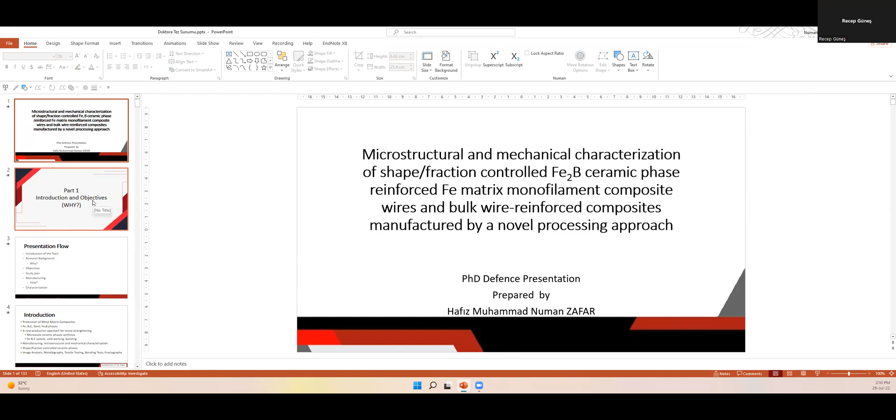So the first part is introduction and objectives. The presentation flow is in such a way - let me make it full screen. I will introduce the topic briefly, then give a little research background and the reason why we did this study, the objectives of the study, how we planned it, and the manufacturing approach - how exactly we have done the manufacturing. So these are the why and how of this study. Then there are different methods in which we have characterized the material we have manufactured. So the overall presentation flow revolves around these headings.

So in a nutshell, we have manufactured metal matrix composite wires. The materials which we have used are iron and B4C, boron carbide, in powder form, and steel tubes, and eventually we have managed to synthesize iron boride phases in the material. This study is a new production approach for metal strengthening, and we have managed to synthesize ceramic phases at a micro scale. For that, we have used boriding treatment, cold working, plastic deformation, and predetermined ratios of the mixtures have been used.

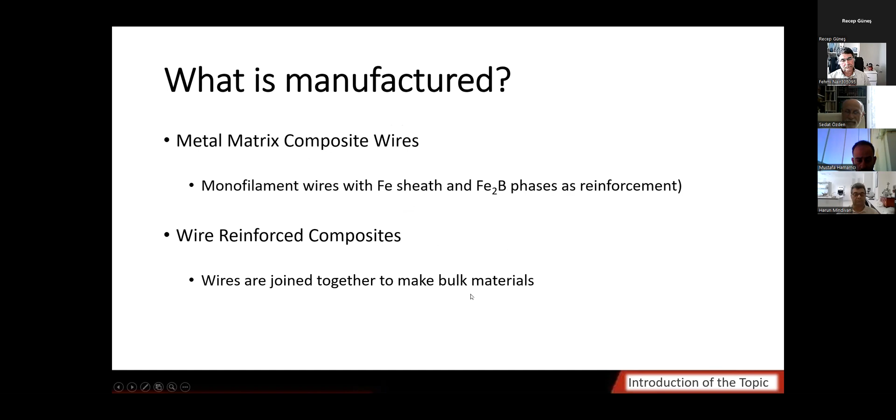So what is manufactured? Metal matrix composite wires. These are monofilament wires in which the sheath of the material is iron, and Fe2B phases act as reinforcement in the wires. The second part of the study is wire reinforced composites - whatever wires we have produced, we have combined them and made a bulk material with that. So that is what has been manufactured.

I will very briefly tell you about the metal matrix composite wires. If we divide the metal matrix composite wires according to their properties, we have seen industrially active wires which are high strength wires, high conductivity wires, and high strength and high conductivity wires all together. The high strength wires are 4 millimeter to 12 millimeter wires made of high carbon steel, which we have seen in fences outside buildings for security regions. Medium carbon steel wires are also available in industry and used similarly.

These are high strength wires - no other functionality is expected from them other than yielding, some ductility, and strength. Then the second type of wires we have seen in metal matrix composite wires are high strength and high conductivity wires. Me and my respected supervisor, Dr...

Fehmi Nair, we wrote this paper, which is basically a review paper on high strength and high conductivity wires, while I was doing the research for this study, for my thesis. In this paper, we have shown how the composite wires are manufactured, what type of metal matrices are used, what type of strengthening mechanisms are used, what type of materials they use, and what type of methods they use to produce them.

The most famous method for making composite wires is plastically deforming them. What they do is select a sheath of a metal, and put a strengthening element inside the sheath, and that material in a monofilament state is subjected to various plastic deformation techniques. You can bundle them, deform them, cold roll them, heat treat them, whatever you want, but the main purpose is to plastically deform them from this size.

This is about 8 to 12 millimeter, and then it comes into maybe a 2 millimeter wire size. After passing through this series of cold rolling and heat treatments, the tensile strength of the wire is extremely high, and then you can use these wires.

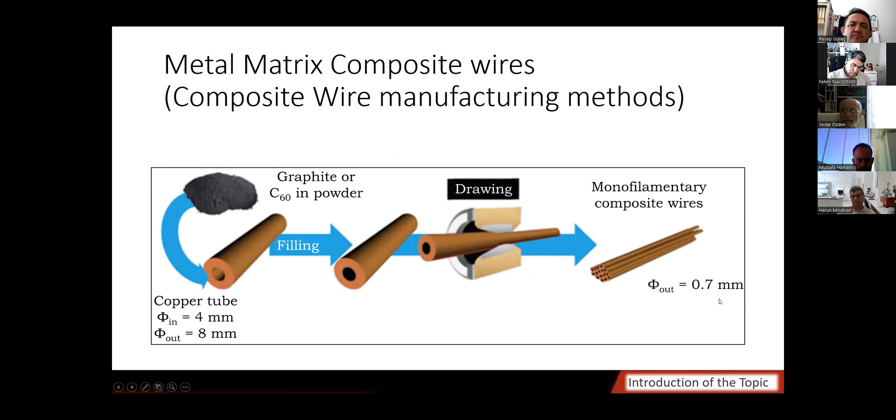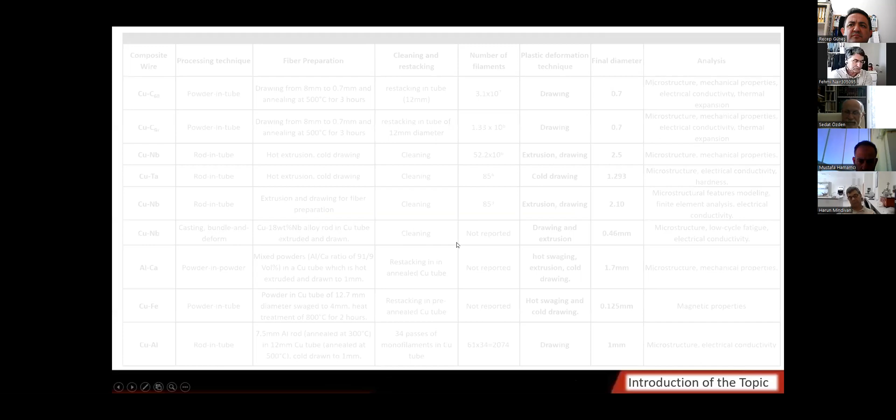Here I have this table which belongs to my thesis. I selected this to show how different types of composite wires are used and what type of technologies they use. For example, mostly we see powder in tube, but there are also rod in tube combinations and others. The eventual size of the wire is in this range: 0.7, 2.5 millimeter, 1.2 millimeter, 2.10 millimeter, and 1 millimeter. These are the number of filaments which are produced.

How do we know the number of these filaments? Because we have used plastic deformation, and each rolling pass which we used was in our control. So we know at which monofilament we started, and eventually how many filaments we established inside. So these are the range of diameters of composite wires after the deformation, and these are the starting diameters, 8 to 0.7. These are some fields in which these composite wires are used.

They are used in... one second, please. Could you go back to the last page?

Yes sir, you said it is related to your thesis, or is this something you have done? This is not - this is the background of my study. So this is information from literature. Exactly. What the composite wires are, which diameters they have used. I wasn't sure why I said that - so when you said it belongs to my thesis, I thought you did it. Of course not, we did not do this. This is background, from the literature. Yes, actually a published paper also.

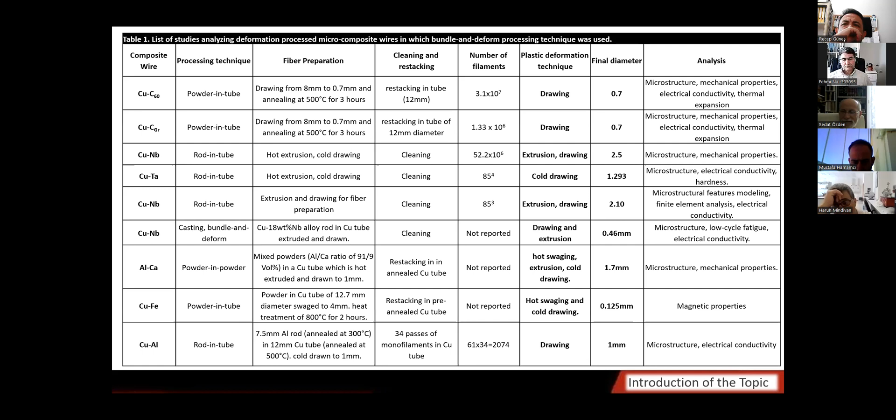These are the applications: long pulse, high field - why? Because they are conductive. High field electromagnets, because during the making of electromagnetic fields, you need high strength wires because of Lorentz forces.

High voltage electric transmission wire cables use aluminum, because it is light and also conductive. Bulk materials at nuclear sites are used because, again, depending upon the type of strengthening element, if it performs well and does not swell at the nuclear sites, you can use it there.

Antibacterial implants - copper niobium wires are used as antibacterial implants because they are compatible with human tissue. Diamond wires are used for cutting slabs and ceramic materials, because they are high strength and high conductivity. You can use them as cutting wires, and they are famous as diamond wires because diamonds are impregnated on the sides of the wires, so you can use them for cutting slabs.

Okay, now after that, I'm coming to my thesis.

Based on the paper we have published, I have seen that many people have worked on composite wires. If you look at the literature, there are a lot of studies reporting the microstructure and other aspects of composite wires, but very few have made wire reinforced bulks. They complete the manufacturing at the wire level and stop there, because their eventual purpose is to make wires. Very few studies have used wires as a reinforcement element in wire reinforced composites.

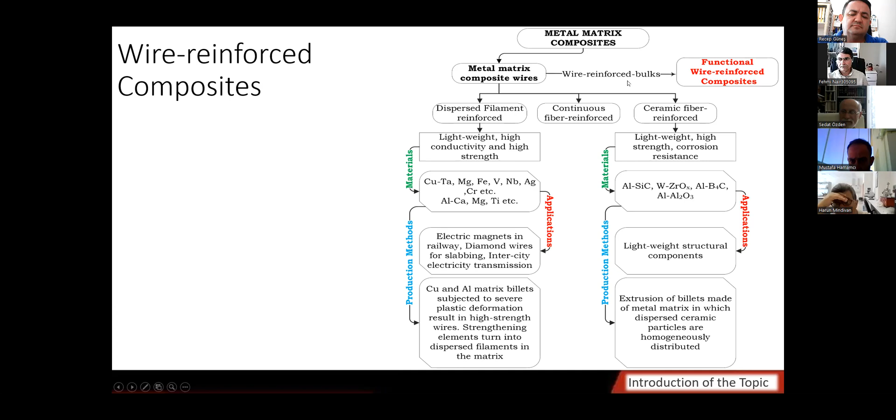Here, copper, magnesium, and aluminum are the dispersed filament reinforced wires. I have already given you the background about this. These are functional wires, used as lightweight structural components. Applications and types of materials are reported, and we studied this and made a review about it, but then we proceeded to functional reinforced composites.

Functional wire reinforced composites, to be exact. How are functional wire reinforced composites made? The most famous technique is squeeze casting. You take a wire, clean it, stack it, put a metal melt on it, and then eventually machine it to the resultant final product. That is a wire reinforced metal matrix composite. This technique is industrially active, but it is an old technique.

Here is Zafer. Yes, sir. Go back. One page back. Yes. Here, the thickness of the foil is more or less the same as the wire.

So would you call them plates or foils? These ones, we can call them plates, not foils. Yes, okay, we must call them plates. You are right, we must call them plates. Foil is something used only to assist the bonding, not serving as a matrix. If you actually desire to make a matrix, we must not call them foils, we must call them plates. It could be better, probably. But if you look at this image, the thickness is not actually like a foil, this is a matrix form, but because the literature-active term used for that is foil, I have used foil. Actually, I was also thinking it is not a foil. Okay, I agree with you.

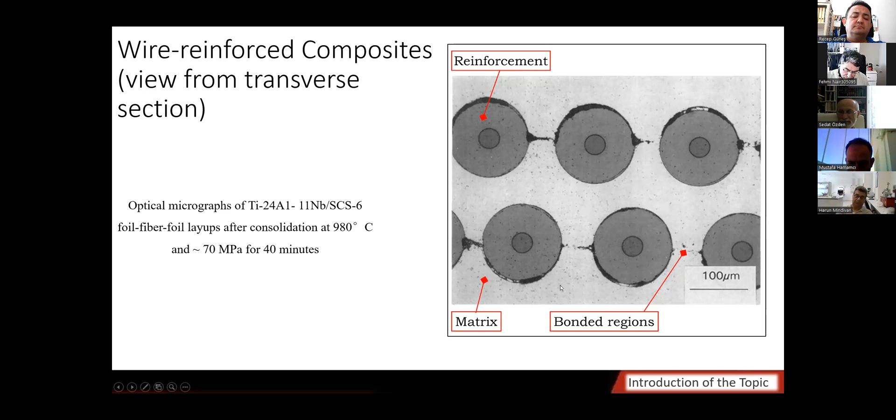So here is an example from the literature in which wires are used as reinforcement, and here the bonding has partially occurred, not completely, and this titanium is working as a matrix.

The current ceramic particle reinforced wires produced in industry right now use a mechanical approach. What they do is use extrusion and drawing. Before extrusion and drawing, they mix powder forms of ceramic particles with the metals, and subject them to extrusion, drawing, and other techniques, for example powder mixing by ball milling. Then they are hot pressed. A series of treatments, as I have shown you in previous slides, and eventually ceramic particle reinforced composites are produced. The ceramic particles work as a strengthening element of the composites. This is a mechanical approach.

They use physical or mechanical methods to distribute the ceramic particles in the metal matrix. But because the ceramic particles are really hard, these methods only help in distributing them, and the most work is done on the matrix because they plastically deform the matrix, not the ceramic particles. So they do not have good control over the geometry of the ceramic particles inside.

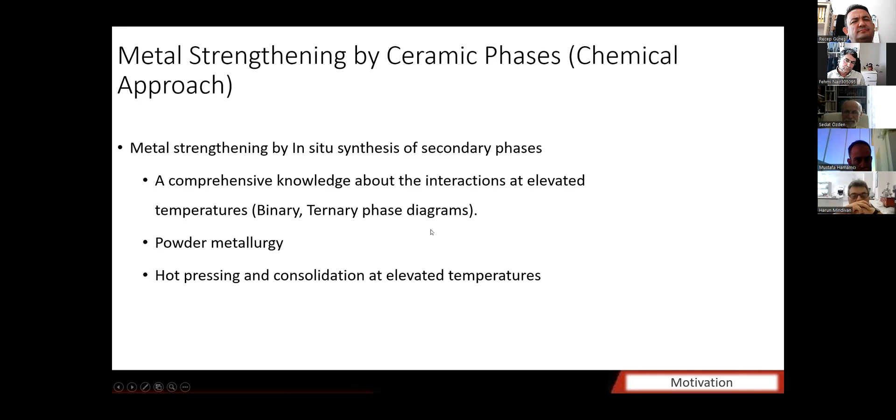As I told you, we need to have some knowledge about the interactions of the used powder particles at elevated temperature. You must use binary and ternary phase diagrams to understand what type of phases are going to be produced. Powder metallurgy is necessary, and I will show you why, along with hot pressing and consolidation at elevated temperature. So this chemical approach can be used to make ceramic phases reinforced metal matrix composites.

This study belongs to composite wires. This is my study in which I have used cold rolling after compaction, and I have also used elevated temperature sintering. My in situ synthesized phase is iron boride.

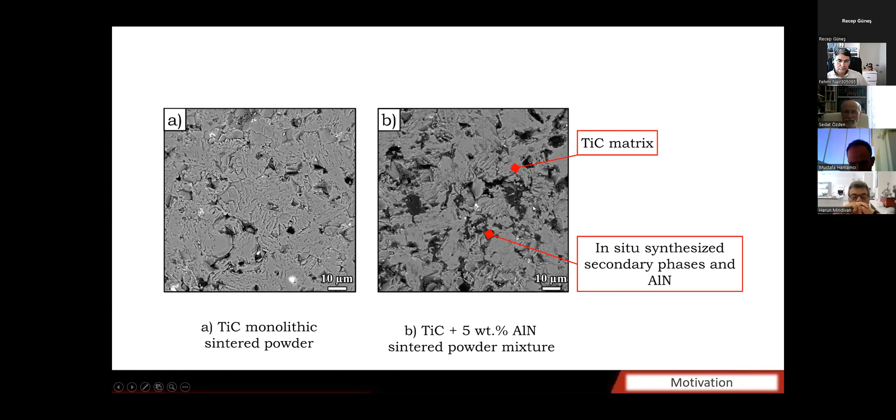Here is an example of the microstructure in which titanium carbide is reinforced by the in situ synthesized secondary phases. Powder form without any phase, and powder after heat treatment is strengthened by the secondary phases. Here is another example in which titanium is in situ reinforced by these secondary phases. So metal reinforced by ceramic phases, chemical approach.

This is totally related to my study because they have used iron boride phases, low iron boride and high iron boride phases, and they have used iron as host particles for the strengthening of iron particles. But before going to that, we need to understand what exactly is going on here.

Boriding is a surface treatment which you might have heard of, in which boron particles are impregnated, actually diffused into the iron lattice and surfaces of steel materials. Steel hosts are hardened and used in wear applications, mostly in wear and high oxidation applications, and they give corrosion resistance to the material. What happens is the formation of hard iron boride phases occurs on the surface of the steels.

We have used the same phases, not as surface enhancing phases, but as in situ strengthening. So our approach might look like the same physical and chemical phenomenon is happening, but it is different because we are using it as an in situ synthesis of iron boride phases, which will eventually strengthen the matrix.

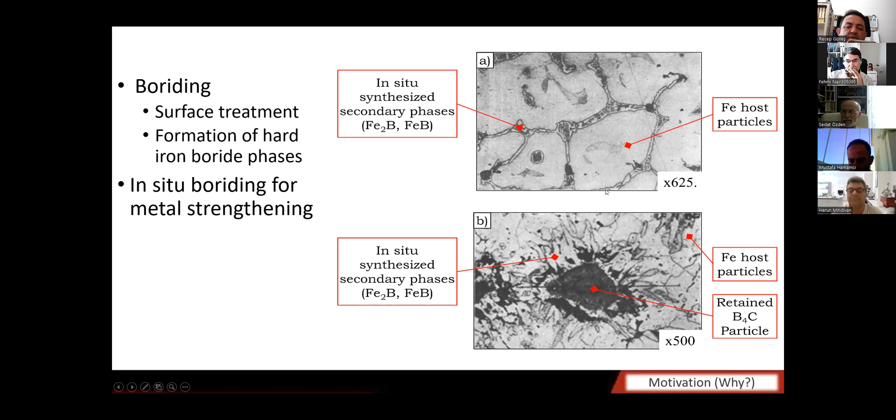Here is another example. This is a Turkish researcher who used a similar approach, but he individually borided these iron host particles, and he managed to get these ceramic phases on the surface of the iron particles. Here is another example in which in situ synthesized iron boride phases are used, but because they used a very high temperature, a liquid phase was formed on the surface, so they were not able to control the composition of these phases. But this is also an example from the literature in which the iron particles have been borided.

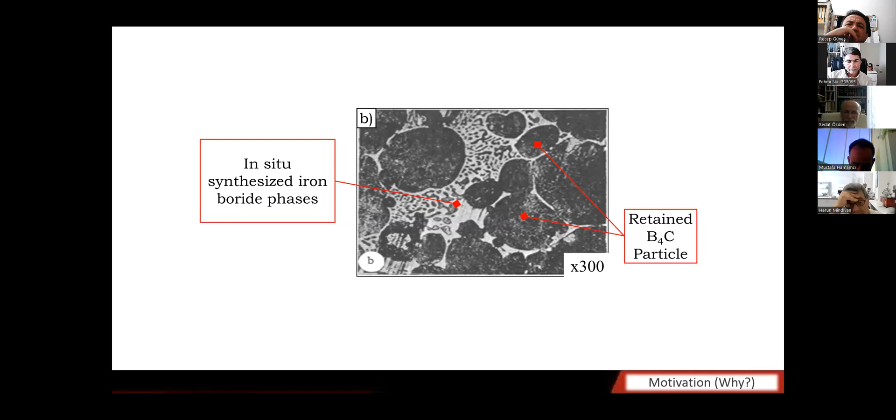Last night when I was checking the literature, I came across that on 31st of August 2022, Metals, which is a very prestigious journal in our field, opened an option for ceramic reinforced metal matrix nanocomposites. And when I was studying the details, it was shown that if you have a new processing approach, a different processing approach, any chemical approach is also welcome in which the metal matrix is strengthened at nanoscale.

So the objectives of this study are: Fe matrix, Fe2B phase reinforced monofilament wires manufacturing, with controlled morphology, shape, and distribution of the fraction of iron boride phases. Then ceramic wire reinforced bulks are produced, in which the Fe matrix is reinforced by the wires at a macroscopic level, and the wires are further reinforced by the iron boride phases.

This is the type of anticipated material which we are expecting, at the atomic level, iron boride phases inside the core of a wire. The core goes into the steel, and a composite wire is produced.

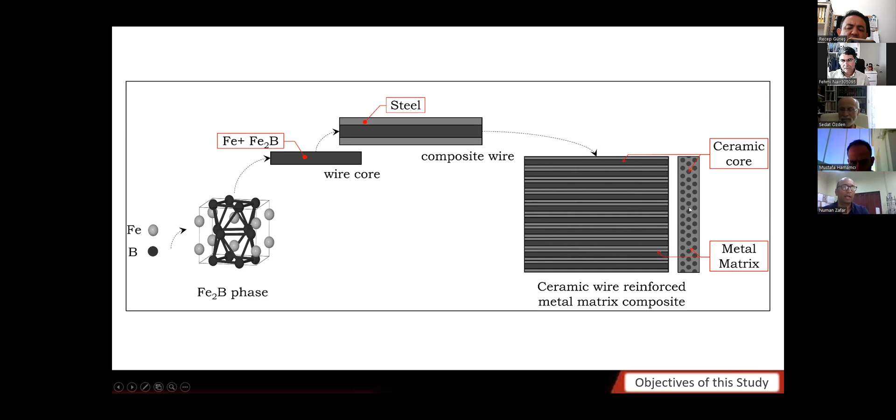So this is a typical microstructural characterization. I have studied the cold deformation behavior of the powder particles before phase synthesis and after phase synthesis, and I have studied the influence of B4C content in the boriding of Fe particles. And here I have also reported the microstructure of wire reinforced bulks. Because I'm going to show you all of them individually, I don't want to waste time here.

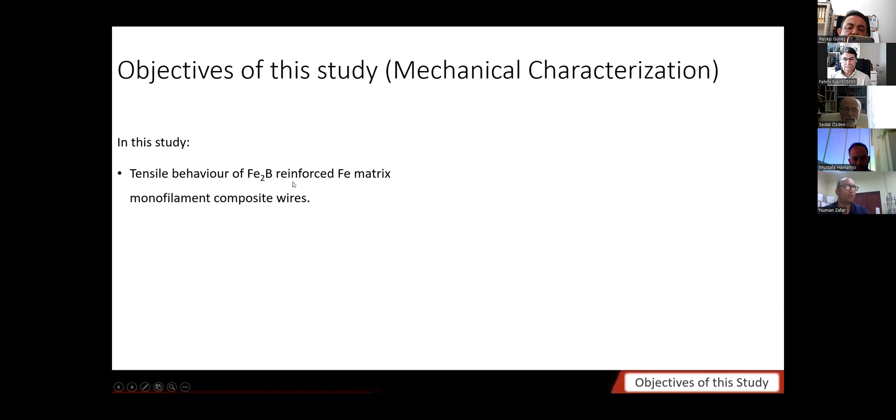The mechanical characterization is done by the tensile behavior of Fe2B reinforced composite wires, and ultimate tensile strength of the wires is also reported, along with the hardness of the sheath and the cores of the wires.

All these studies are mechanical studies at the wire level, and then these studies are at the bulk level. We have used 3-point bending tests. Interlayer shear strength of the wire reinforced bulks is reported, and hardness of various regions in the wire reinforced bulks is also reported. So these are the mechanical characterization objectives of this study.

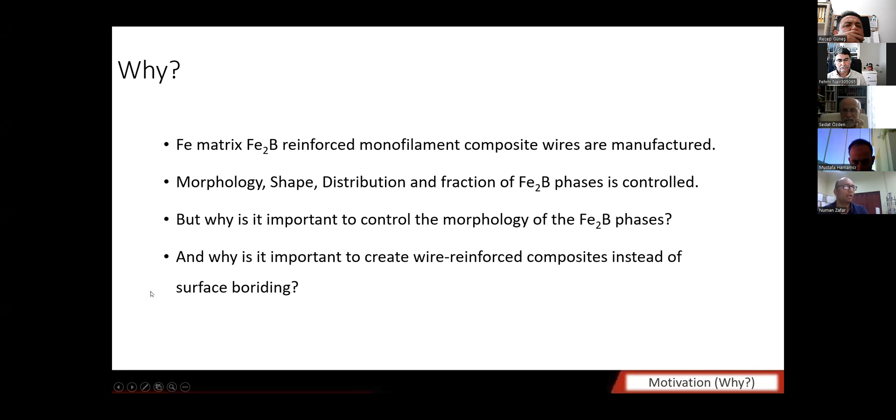I have told you that we have been able to control the morphology of iron boride phases at the wire level. But why is it important to control the morphology of Fe2B phases? And why is it important to make wire reinforced composites instead of surface boriding? I will try to answer them now.

In November 2021, this paper was published while I was trying to find a way to control the morphology and orientation of Fe2B phases. This study reported the influence of the morphology of Fe2B phases on the erosion wear behavior of iron boride alloy.

Here are some old studies in which different methods have been used. For example, different methods have been used to control the morphology of iron boride phases, the effect of orientation, the influence of iron boride phases on corrosion behavior, and different ways to control the morphology and microstructure size of iron boride alloys. So this topic is, both industrially and in the literature, a new topic indeed.

All of these studies used casting and elevated temperatures to achieve the same thing. I have managed to do the same thing without involving liquid phases and without using elevated temperature.

And here is the reason. One might ask, why go through all this trouble and not just surface boride the material? The surface boriding of steel is used only for corrosion and wear resistance in aggressive environments. Mostly, whenever you have a steel, because you have a lot of wanted and unwanted elements in it, whenever you apply surface boriding, there is this softer sublayer which is formed under the borided element. In this approach, we don't believe something like this will happen.

What was your aim? Well, first of all, as I showed you here, they have been using different methods to control the morphology of iron borides. Their main purpose was to control the corrosion behavior and to make a material which is corrosion and wear resistant, using a quite difficult manufacturing approach. My main focus was to use an easier and much less complex manufacturing approach. But eventually, our applications also matter, because the phases produced are very hard and tough at the same time, making them most suitable for wear and tribological applications.

Okay, let's say I am a manufacturer, okay?

Yes sir, I want to invest money, so advise me where shall I use this material? Well, I was discussing this with my supervisor, and he also told me that this is the core question. Yes, core question. Because these wires are produced as a strengthening element, they can be used anywhere.

Where you want a wear-resistant material in tribological applications. I believe so. Okay, military equipment - because the metal matrix is conductive and lightweight. Also in magnetic applications, because we have used steel as a sheath, and it is a magnetic material.

And also in the previous study, Dr. Mustafa has studied the impact behavior of these phases, so they can be used in military applications. They can be used in the sleeves of the pistons. We have discussed this - wherever you require hardness and toughness at the same time, you can use this strengthening element wires.

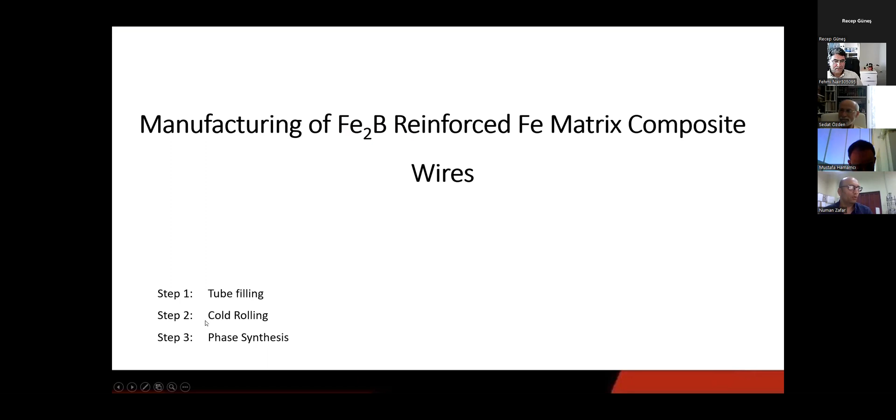Zafer, yes sorry sir, for interrupting, but sometimes I need to ask. Sir, the more you ask, the more I will be directed in the right direction.

Thank you. These percentages, are they from literature or from experience? 5, 10? These are from a very comprehensive analysis I have provided - I will show you in the next slides. Okay, they are not random. I didn't say that - are they just from literature or from past work experience?

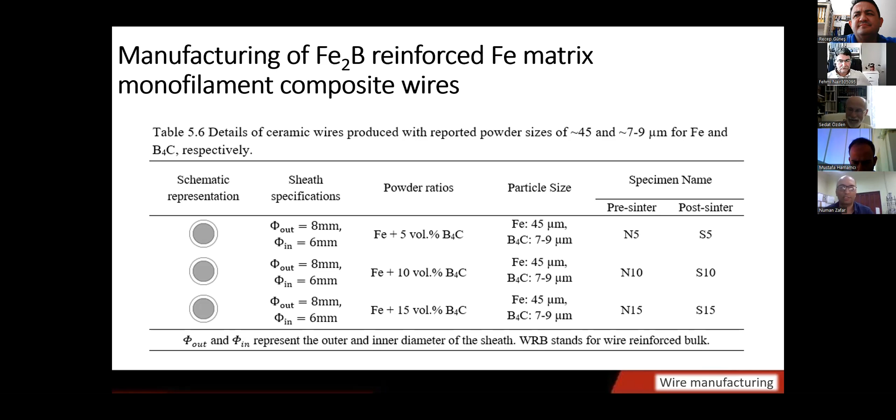These percentages are provided because I want to make a phase of only a single phase, low boride phases, and these are after an analysis we have done on the ternary and binary phase diagrams. After studying that, we have used these ones. These ratios correspond to these weight percentages, and these weight percentages correspond to the phase diagram, the type of phases we want to acquire. Yes.

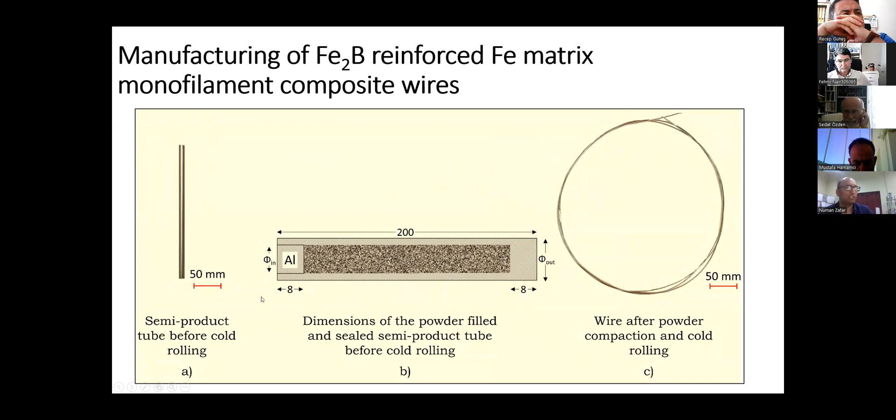After filling the tubes, here they are subjected to this cold rolling device, going from 8 millimeter to about 1 millimeter. The cold roll wires reach from this state to this state - these are the dimensions of the material, and they are capped with aluminum so that the powder does not remove whenever we subject them to cold rolling, plastic deformation.

This is the cross section of the wires. At this state, we have only powder mixtures inside the core, and outside we have steel sheath. And you go down as the deformation level increases, and these are the wires from the side view.

Here's another image of the wires so you can get an idea of the dimensions. This is the schematic representation of the wire reinforced composite wire manufacturing process: tube filling, compaction, cold rolling, and boriding treatment.

How long are these wires? How many meters did you manage to draw? We started with 200 millimeters, and they reached sometimes 2 meters and 2.5 meters.

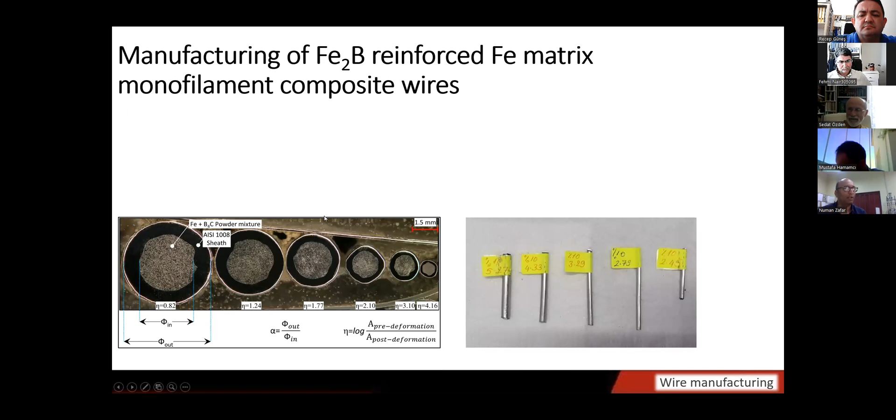Did you experience breaking failures? Only when the sheet is so short, anytime you go through rolling it will fracture from there.

But if you see, they are bendable, and being bendable is a good thing indeed, because there is flexibility.

What we are expecting from the materials is shown here: this is the powder mixture in the non-deformed state, and this is the powder mixture arrangement after deformation. The carbide particles, being ceramic and hard, are not going to experience any deformation, but the iron particles, the white ones, will be elongated after cold rolling. This is something we are anticipating, and of course it is expected.

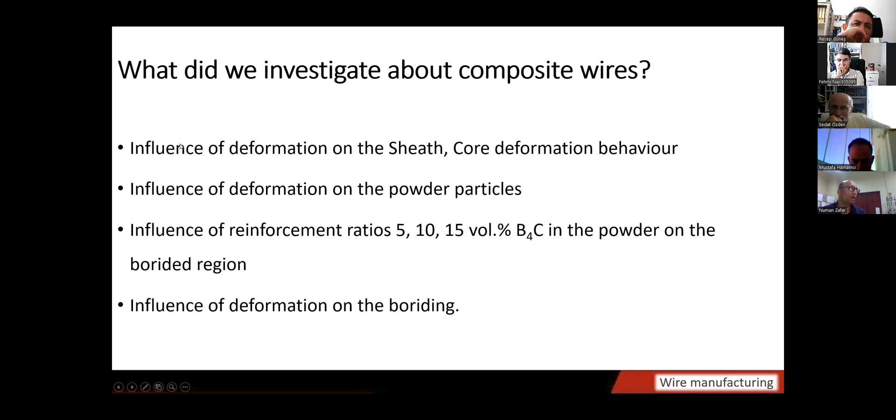These are the things we have studied: the influence of deformation levels on the sheath and the core, the influence of deformation on the powder particles, the influence of reinforcement ratios of 5, 10, 15 percent on the borided region, and the influence of deformation on the boriding treatment. These four questions we asked after the manufacturing.

Summary: 8 millimeter wires filled with 5, 10, and 15 volume percent reinforcement. As you go down, you increase the deformation level. You have these types of wires, and for each set of reinforcement ratios, you have this many wires with you.

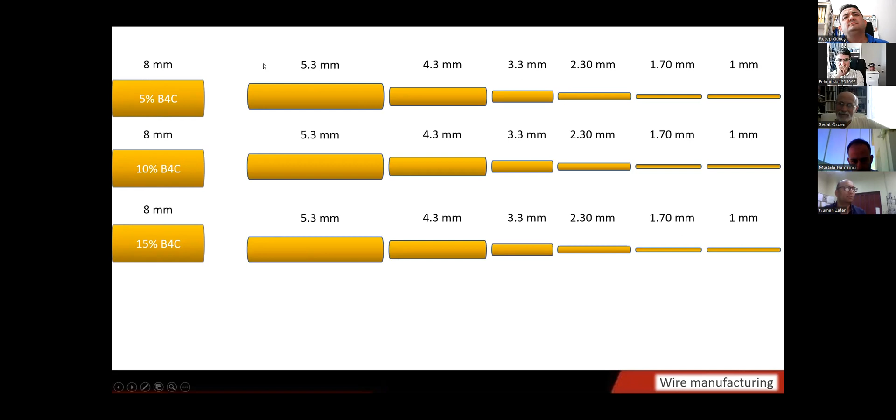These wires, in the pre-phase synthesis state, have no heat treatment applied yet. They are subjected to in situ boriding, and then you get another set of wires believed to have iron boride phases inside them. Then you have all these parameters to investigate: influence of deformation level and increasing reinforcement ratios in the pre-sinter state, and influence of deformation levels and increasing reinforcement ratios on the borided regions in the post-sinter state.

So at this stage, we can say that we have managed to do something, but in detail I will show you in the next slides.

The next step is manufacturing of wire reinforced bulks. Again, very simple: tube filling, cold rolling, and phase synthesis with interwire diffusion bonding. Three steps, not too complicated. I've explained up to this point, and now I'm explaining this region.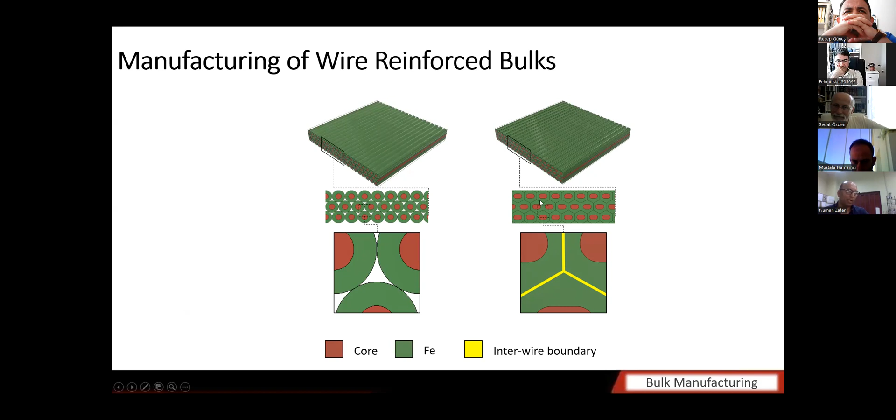So what do we have? Option 1: tube filling, cold rolling, phase synthesis, and wire bonding. But it's not as simple as that, because after the phase synthesis, the sheaths of the wires get oxidized, and you have to clean them through a lot of machining, chemical cleaning, and maybe physical abrasion before you can bond them together, which is not practical.

So we use the second option. This is inevitable, you cannot escape from these two steps, because you have to have composite wires at the 1 to 1.5 millimeter level. We want in situ boriding in the cores of the wires and interwire hot diffusion bonding at the sheaths of the wires at the same time. Only then is it going to be something practical.

These are the schematics of bulk manufacturing, already explained up to this point. 30 by 30 millimeter clean wires are stacked together and subjected to this heat treatment. Eventually we expect diffusion of boron atoms from the B4C particles to iron, synthesis of iron boride phases in the cores, and interwire hot diffusion bonding at the sheaths. So this treatment is the same as the old one.

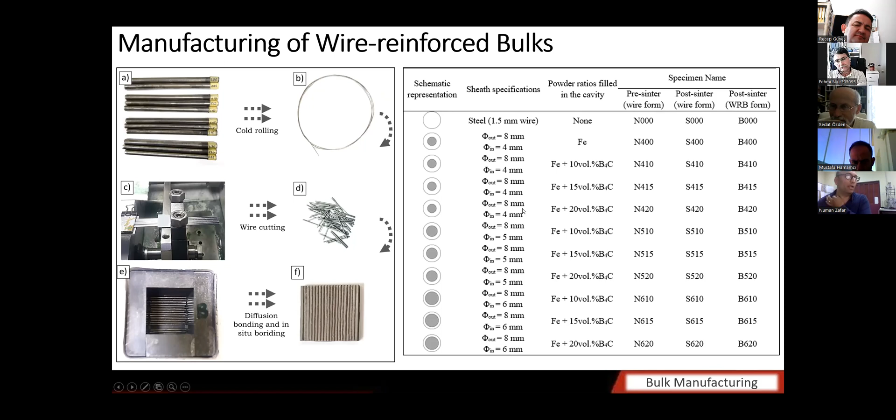So I have three reasons, because I want simultaneous iron boride formation, and also I want the interwire bonding. I need to take care of these three parameters. I will go one by one.

Pressure is an important parameter. I need to know what type of pressure I should exert for the wires to be bonded. Temperature, nothing much I can do about that, because at least above 900 degrees centigrade is required for the in situ synthesis. And duration also matters, because diffusion of boron into iron requires a lot of time.

We must have enough time to ensure formation of iron boride phases. For the pressure, what we did was hit and trial: lower temperature, low pressure, then increase the pressure to 35 megapascal, and eventually we saw that these wires are able to join at this level. In this place, you can see there are no voids. At macroscopic level, you cannot see voids.

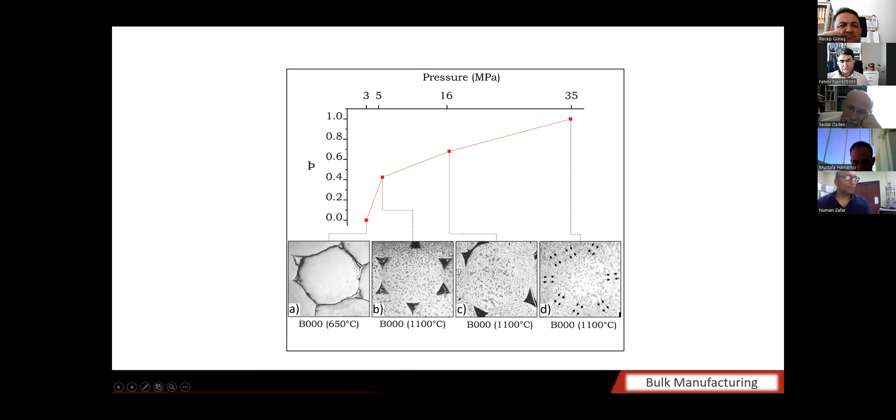So we decided that our treatment temperature should be 1100 and the pressure should be 35 megapascal. This parameter is defined to see the complete bonding. It is defined by the bonded length divided by the overall circumference of the wires. And this parameter reaches 1 at this value. So we used 1100 degrees centigrade and 35 megapascal.

Okay, the next thing is, how are you going to make this phase synthesis if you don't know the type of mixture ratios you should use? For that, we need to calculate the phase diagrams.

I learned to use this software. It is called Thermo-Calc. Maybe you have seen it in the literature. It draws the phase diagrams for the compositions which you have used for the elements, and it uses this online database for calculating the phase diagrams.

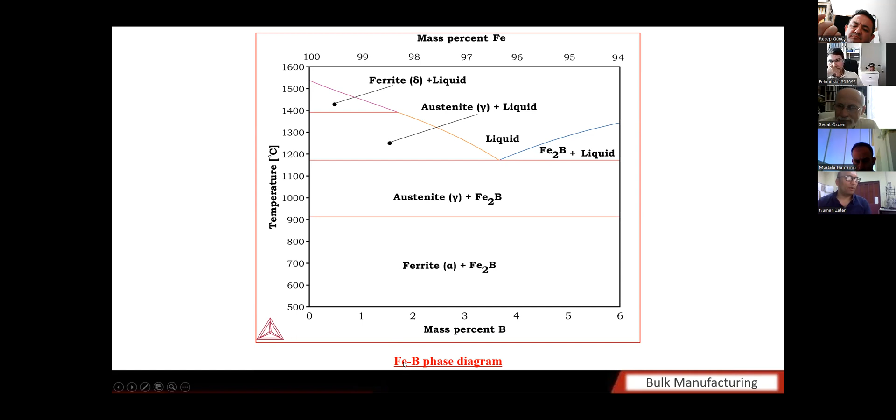And here is an image of iron boron, which is again calculated for the compositions I have used in this study. But because I am using three elements, I should find a way to introduce carbon into this phase diagram, or maybe find a way to introduce boron in the Fe-C phase diagram.

For that, with the use of the software I just showed you, I was able to draw the ternary phase diagrams of the material. Now, after drawing the ternary phase diagrams, I need to know where am I working? Am I working here or here?

But because I have already calculated the weight percentages of each element, it is much easier to know where I am going to work. This region belongs to the elemental ratio which I have used for the powder mixture preparation.

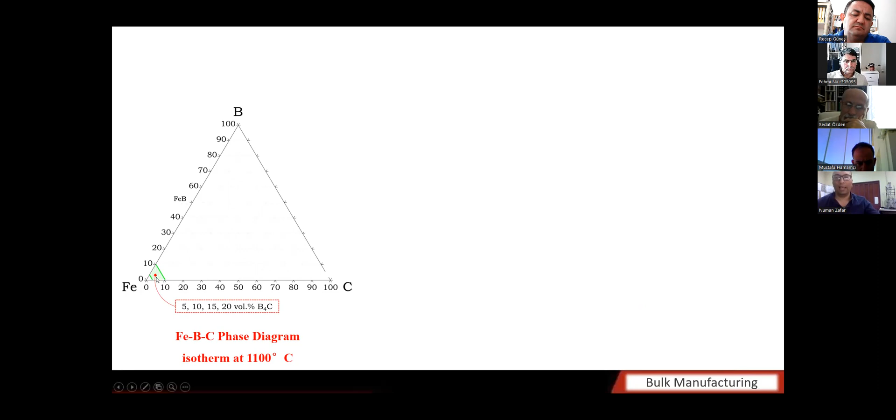The next step is to go to literature and try to find what type of phases are formed in this region. This data is acquired from the internet and also with the use of the software. I am going to work in this region.

Here, this is a magnified version of the phase diagram. So I expect gamma and Fe2B phases to be produced at 1100 degrees centigrade. These ternary diagrams are the isotherms at 1100 degrees centigrade.

If you go to 900 degrees centigrade or 850 degrees centigrade, you will have different types of phases. So this analysis is important if you really want to have a single phase material. But there comes a question: why do you want to have a single phase material?

Well, that has to do with the cracks formed on the borided surfaces. This paper was published two months ago, in which we characterized the types of cracks formed on the borided surfaces. This is not related to our study, so I will skip that.

But while we were investigating the types of cracks, we came to realize that FeB phase and Fe2B phase are not compatible, simply because they have different thermal expansion coefficients. Anytime you try to use them, or they are cooled in an unwanted way, they are going to crack at the boundaries.

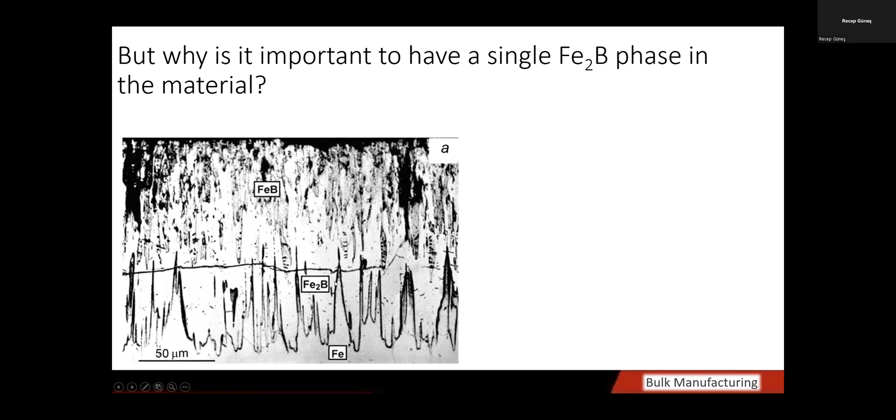So the people working with iron boriding of materials always prefer to form a less brittle, hard and tough, low iron boride phase instead of FeB.

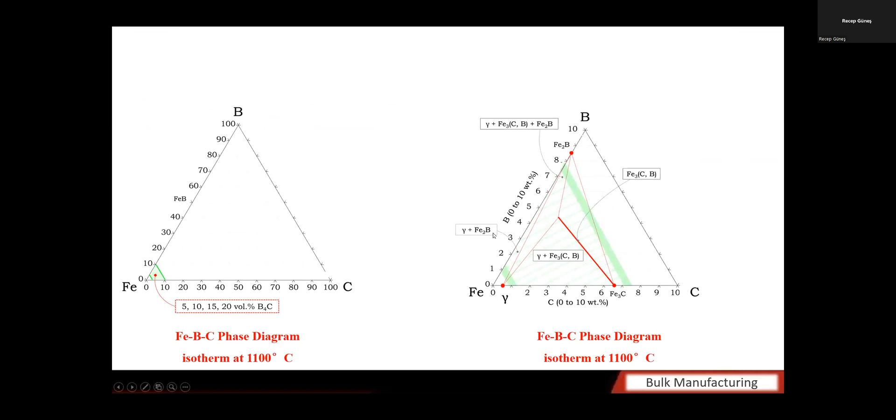That is the reason we must ensure that we are expecting iron boride phases with the types of ratios we are using. That also explains the powder mixture ratios we have used, 5 to 20%.

So for tensile testing of all the compositions and structural configurations I have shown, because the wires are 1 millimeter in diameter, it is very difficult to conduct a tensile test on such wires.

You must have a comprehensive gripping system which can grip the wire, not strong enough to crush it at the grip level, but not weak enough to release it and let it pass over, without transferring the stresses to the gauge length.

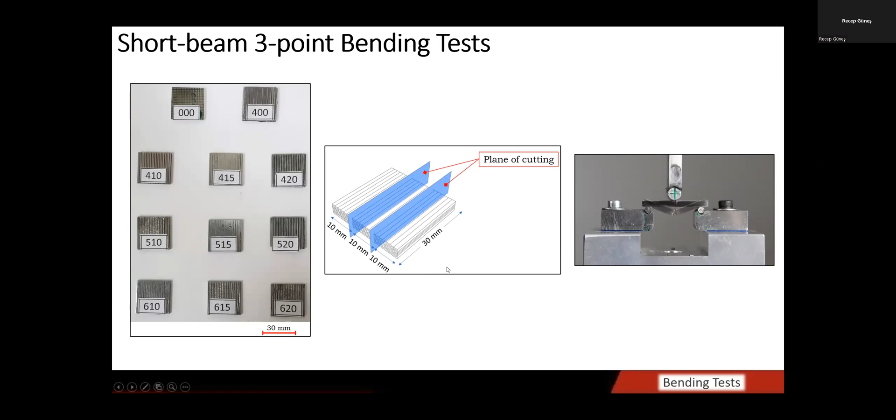So what did we investigate? We used different structural configurations and tensile behavior of the wires at wire level, and the influence of different structural configurations on the bending behavior at the bulk level. These two things are investigated about the wire reinforced bulks, and we also reported the interlayer shear strength by the 3-point bending test. The last part of the presentation is results, discussion, and conclusion.

This nomenclature I have already explained, but I will explain it again with the next slide. These are the types of materials which we have produced: two reference materials, and then increasing diameters and increasing reinforcement ratios.

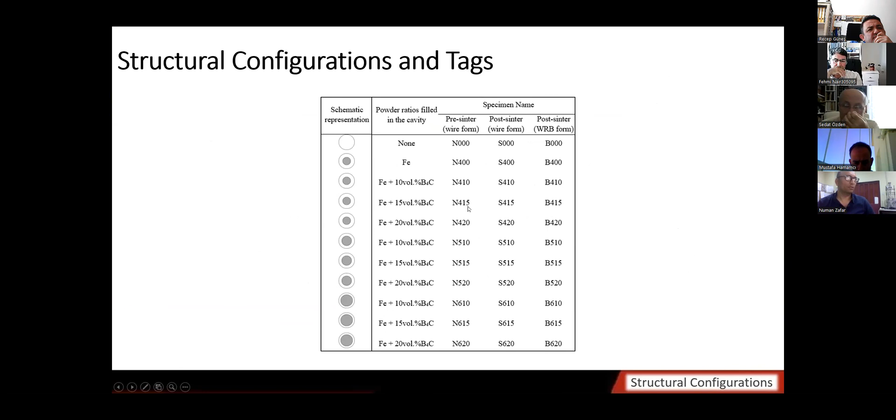Is it too much, Zafer? Agglomeration? Too much, but we have a solution for that, I will explain now, because they may cause problems if there are. Of course they will cause problems, but because they are subjected to cold rolling, they will eventually disappear. Okay.

Here is the influence of deformation on the iron particles. These images are shown at the same magnification level, so the scope of the microscope is the same, but a higher number of particles are introduced inside the scope of the material. This shows that these particles are compressed and plastically deformed.

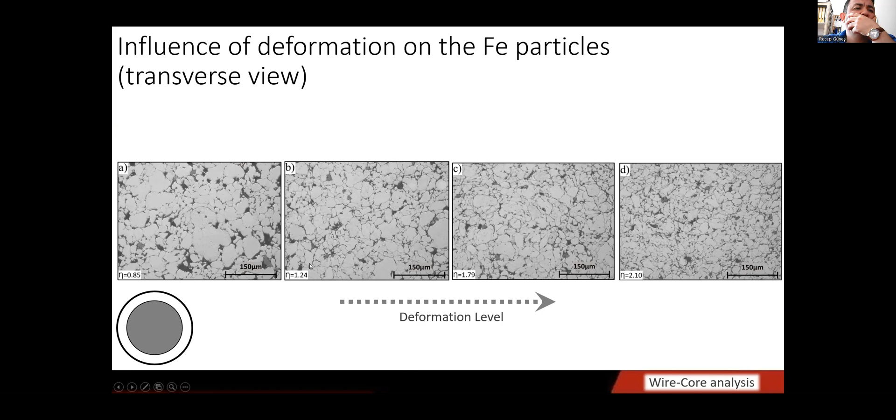But in order to see what is actually happening, we need to see the images from the longitudinal view. So again, increasing deformation level is shown, and the images are shown from the longitudinal view. Thanks to the cold rolling and the compressibility and ductility of the iron particles, deformation levels caused plastic deformation, causing elongation of iron particles in this form.

Zafer: I understand that the iron is elongated. What happens to the hard particles, are they also elongated? Of course not. All the hard particles are embedded inside the material, distributed all along.

I have a few pictures of the microstructure in which the influence of agglomeration on the material's boriding is shown. I will show you at that time also. So we decided to see what happens to the iron particles when they are deformed.

So we did a hardness analysis scan on the core of the material before the sintering of wires. We see that increasing the deformation levels causes a slight increase in the hardness of iron particles, and the average size of the iron particles is reduced like this. The micrometer square area of each particle is reduced as the deformation level increases. This allows us to quantitatively explain how the size of the iron particle is reduced.

You mean is it the area? Area of each particle. Okay, they are circular, I would say. Are they? No, not circles, different geometries. But you are right to ask, how did you measure the area of iron particles?

That is done using a computer program and image analysis. What you do is convert the microscopic images into high contrast images, then tell the program to draw the boundaries around each particle, and each particle is individualized. For example, this is P20 and P24, and each particle individually is reported as a clustered image, and using this scale they report the micrometer square area of each particle.

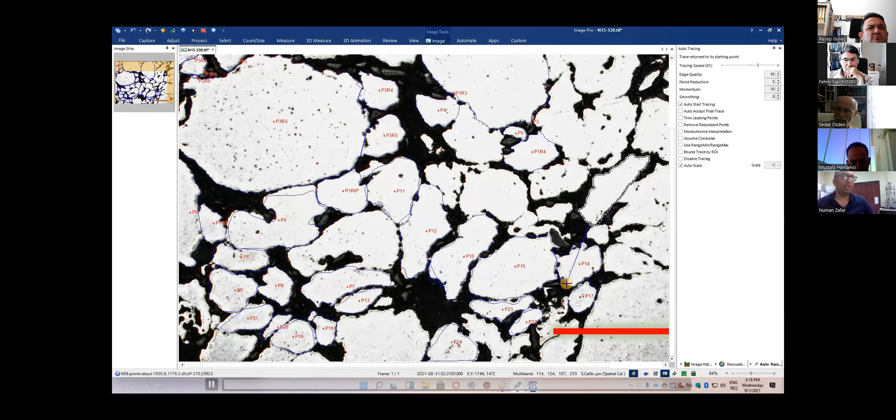Here is the methodology I used to measure the iron particle size. I tell the software to treat the white color as foreground and black color as background, and measure the size of the iron particle. The rest is up to me, what I want to measure and what I want to do with this iron particle. I did this for all these particles at most deformation levels.

Then I reported these iron particle sizes, and I also used that to measure the distribution of iron particles at different deformation levels and at different reinforcement ratios. N5, N10, and N15 show the influence of reinforcement ratios on the co-deformation behavior of the iron particles, going from the lower image to the upper image, showing increasing deformation levels.

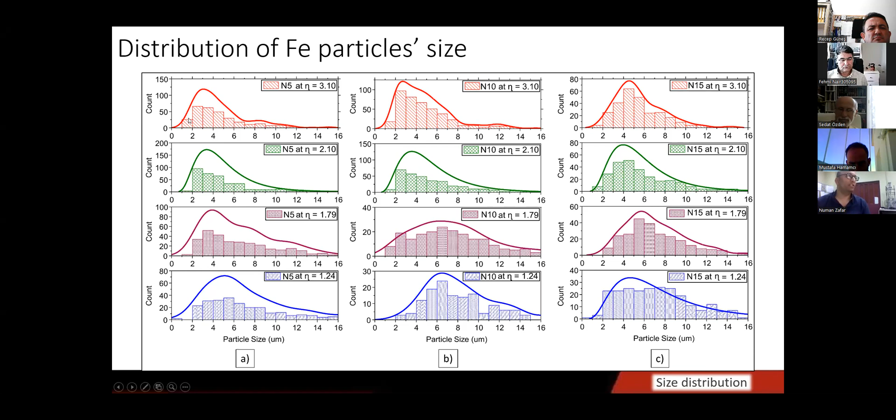What we see is there is a fair distribution of iron particle sizes, but when you go to higher deformation levels, the layer is shifted towards the left side. So it means that a larger fraction of iron particles belongs to the smaller size category.

This is the ultimate deformation level which I have been able to achieve after the cold rolling. These are my 1 millimeter wires, in which you see that all the agglomeration which occurred at N15 at the lower deformation levels has reduced at the higher deformation levels. They have been forced to be embedded in this direction.

This condition is favorable for us because agglomeration is not desired. The electron microscope images also reconfirm that B4C particles have not agglomerated anymore, thanks to the deformation level.

I can call this a microscale work because iron particles of 2 micrometer thickness can also be witnessed. These are B4C particles, all of them, and these elongated particles are iron particles. This state of the particles is something which we desire.

Here is a lower deformation level with agglomerated B4C particles, and a higher deformation level with no agglomerated B4C particles. But I can see that this iron particle is surrounded by iron boride particles, and this iron particle is surrounded by B4C particles. This condition means the particle will be subjected to boriding from multiple directions.

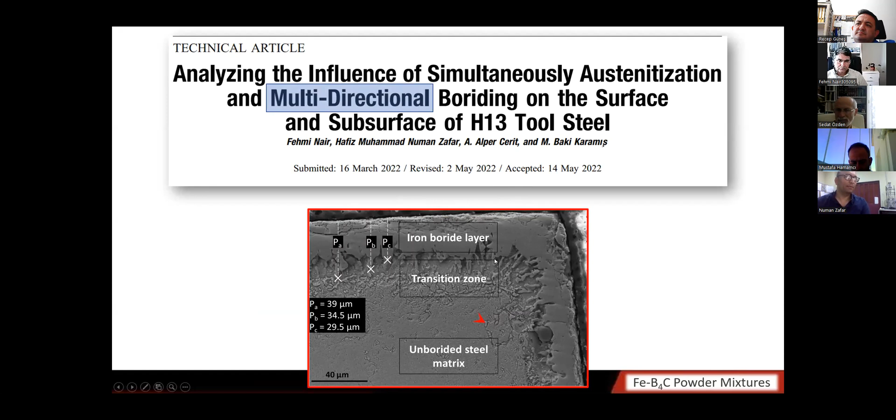In our previous paper, we showed the aspects of multidirectional boriding on the iron. These regions were in contact with the boriding powder from two different directions, so iron borides formed there. We can believe that iron borides will also form on the iron particles, overlapping such that there will be no geometrical discontinuity on the iron particles after boriding. So we are safe with this type of microstructure, I want to say.

So these are the particles before boriding. In situ boriding has caused the formation of iron borides in such a way that you can see the lower reinforcement ratios have caused a smaller iron boride phase synthesis.

These darker regions are iron borides and the background is iron matrix. These are also iron boride phases, and this is also a dense iron boride phase. It is very relieving to see that there are no other phases present. For example, if you had an iron boride and a high iron boride phase at the same time, you would clearly see the difference because of the tone of the color after etching.

We see only a single color for iron borides, and for the background we see the iron matrix.

And here is the sheath core interface. It is very continuous. These grains are ferrite and pearlite grains because the wires are subjected to elevated temperature and rearrangement of the grains occurs there.

They are coarse grains. And here is a region, an inter-iron particle region, in which there was no B4C particle to serve as a boron host. So they don't have any iron boride phases formed here.

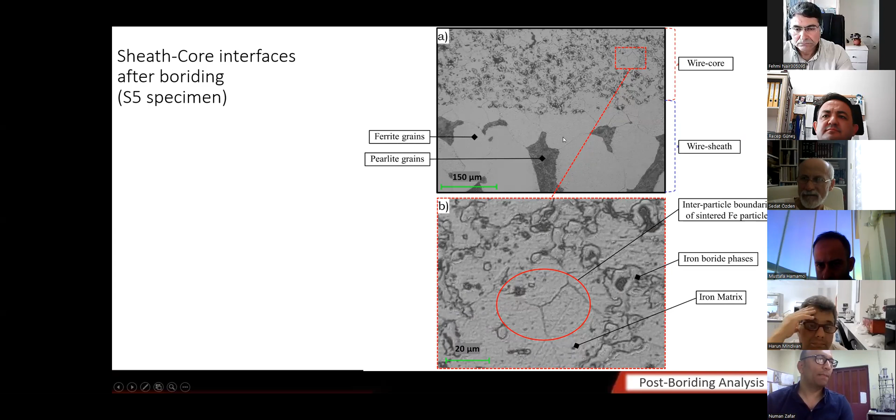Now the next step is to understand the influence of deformation on the iron boride phases. On the left side is a wire of 5.3 millimeter, and on the right side, there is a wire of 2.3 millimeter. They all belong to S10, the material reinforced by 10 volume percent reinforcement ratios. You can see clearly that the iron boride phases tend to elongate in the direction parallel to the cold rolling.

So actually what we have done is that we have been able to control the morphology, and we have given the iron boride phases an opportunity to change their direction by using cold rolling in the pre-sinter state. After the boriding, they are elongated in the direction of cold rolling.

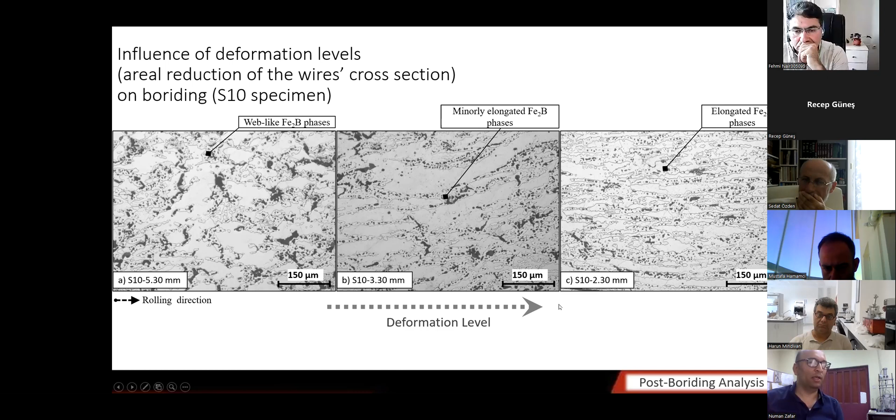So we can see that the true effect of deformation is more visible on the S10 reinforcement ratio, because they have about 50% borided and 50% non-borided region in the core, in the microstructure.

Here is again the ultimate deformation in the 1 millimeter wires. These iron particles, they were not agglomerated anymore. This is the S15 specimen, which had shown the formation of agglomerated B4C particles. But even at micro scale, this is 15 micrometer, we can see iron boride phases are elongated parallel to the direction of the cold rolling.

We can call them ceramic fibers because they are very small at the fiber scale, and you can control their morphology, and you can also control their distribution by using an appropriate reinforcement ratio in the pre-sinter state of the wires.

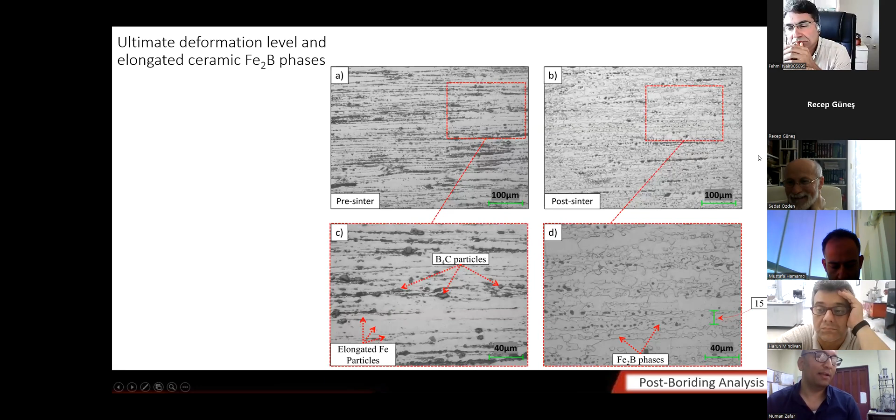What happens to carbon then? Good question - that is something under investigation right now. What happens to carbon is something I have tried to study more and more, but because the iron matrix is also in the vicinity of the B4C particles, maybe it is dissolved in the iron matrix powders. Some say the carbon is in the form of graphite, and because you do metallographic work, it works as a porosity. Or maybe cementite can be formed, but Fehmi can answer because he's an expert in that field - later I will ask him.

On the longitudinal section, if you allow me, I will continue the presentation. From the longitudinal section, you see that the host iron particle is in this state. So after boriding, if there is no other phase in the vicinity to cause a combining effect, the shape of the iron boride phases is going to be dictated by the shape of the host Fe particle.

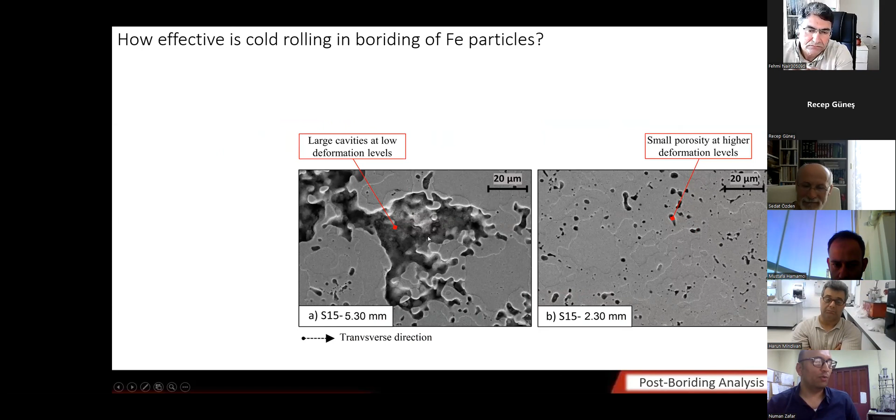This image shows all the types of microstructure observed in the microscope. This addresses what you asked: what if I boride a material with no deformation and agglomerated B4C particles? Large cavities will occur in the core. But the same material, S15, if deformed and brought to a 2.3 millimeter wire, reduced porosity will occur. So agglomeration is not desired. This is also why we used plastic deformation, cold rolling, to distribute the iron particles so there is no agglomeration remaining in the core. Eventually, this allows a higher region to be borided without agglomeration, using cold rolling. If you compact them without cold rolling, you might see these big porosities. Here is the hardness of the sheaths.

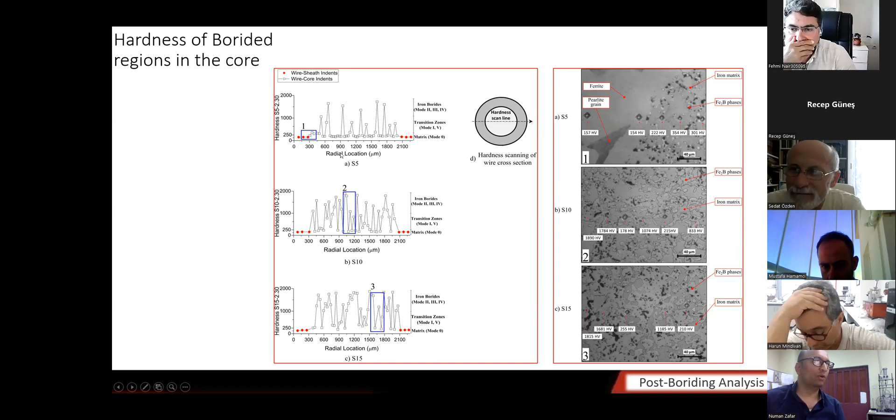These graphs were prepared to characterize and see whether we actually succeeded in increasing the hardness of the material. So we did a hardness scan line on the wire cross-section for S5, S10, and S15 specimens. These rectangles 1, 2, and 3 correspond to the indentations shown here - for example, these red indentations are from the sheath, and the remaining are from the core. I will magnify them so we can discuss this. Because a small region is borided in the S5 specimen, more indents belong to the matrix, and only a few belong to the high hardness region.

It belongs to the Fe2B phases. But it is very overwhelming to see that you have a material which has such contradicting properties. You have a wire with a sheath so ductile that you can bend it, but at the same time in the wire core, you have iron matrix and iron boride phases which can reach a hardness of about 1950 Vickers hardness, 7 times larger, maybe higher.

As the borided region increases, more numbers try to shift from the matrix form, from mode 0 to mode 2, 3, 4. And these indents show a hardness of maybe 2000, while at the same time you have a very small hardness in the matrix.

And this picture belongs to the S15 specimen. Same logic is prevailed here, but I want to take your attention to something, because this is not that simple. On the low side, you see the hardness of the iron matrix and the sheath, and on the high side, you see the hardness of the iron boride phases. There are these transition zones, mode 1 and mode 5, which have a hardness in between these two.

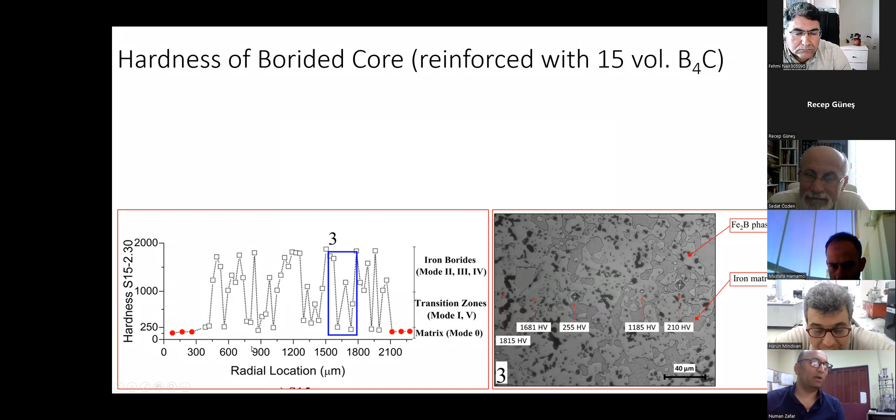And 5 and 1 might have a similar hardness because although it appears to be an iron boride, it is embedded in a very soft iron matrix. That is why it might show a lower hardness than expected. This explains why we have also witnessed hardness values which are not low enough to be called iron matrix, and also not high enough to be called iron boride phases.

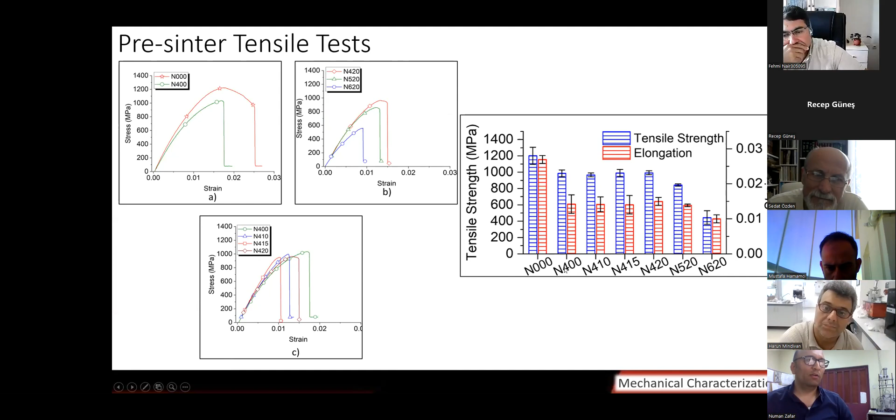Yes, yes, sir. Here I have shown the influence of pre-sinter wires' tensile behavior. Diameter of the core is the most influential factor which changes the tensile behavior of the wires.

But when you go from 420, 520 to 620 and increase the core diameter, the tensile strength and tensile strain both decrease.

This is the comparison between the pre-sinter and post-sinter wires. There is an overwhelming and dramatic decrease in the tensile strength, but at the same time increased ductility. It is safe to say that the sheath of the wires had very coarse grains because of the heat treatment. Although we have managed to acquire iron boride phases in the core, because of the sheath, the tensile behavior of the wire changed such that recrystallized and coarse pearlite and ferrite grains have given a lot of ductility to the wires.

You mean the grain growth, is that correct? Exactly, the grain growth and the coarse grains. I have shown you a wire sheath interface. You see there are big grains.

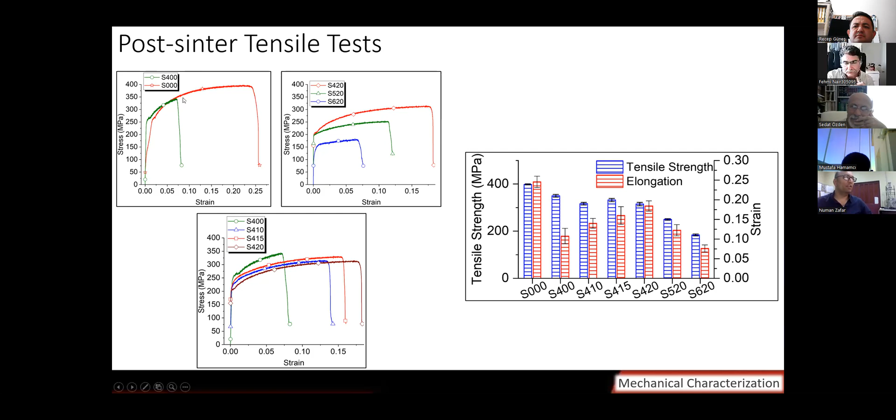Here is the comparison of post-sinter tensile behavior. The presence of the core has significantly influenced the tensile behavior in the post-sinter state more than it did in the pre-sinter state. There is an overwhelming decrease in the strain and also a considerable decrease in the tensile strength of the S400 specimen. But I want to also tell you that this was just like a needle, a 1 millimeter wire, or maybe 1.5 millimeter wire, which has no discontinuities, no reinforcement, no core, nothing. You try to pull it, and it will eventually break.

Here you can see that again, increasing the core diameter decreases the tensile strength and the strain of the wires, and the presence of the iron boride phases increases the strain of the wires. But the overall behavior of the wires, if they have the same core diameter, is almost similar, not very much different from each other.

But is it a bad thing or a good thing? It is not a bad thing. Actually, it is a good thing to see that the presence of a larger fraction of iron boride phases does not have a dramatic effect on the tensile behavior of the wires, because tensile strength is not the only criteria for mechanical properties. We have acquired a very overwhelming high hardness in the cores of the wires, as I have shown you in the previous slide.

This is again, Zafar. Yes, sir. Not for composites, for bulk materials, as a rule, hardness and strength are related. Yes, sir, if the material has a high hardness, the strength is also high. Yes, but sir, here we have just the opposite result. What could be the reason? Sir, the reason is the discontinuity of the core and the sheath.

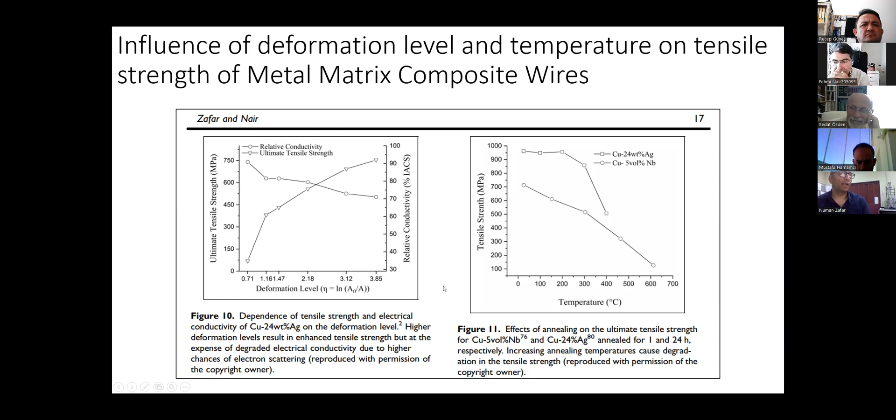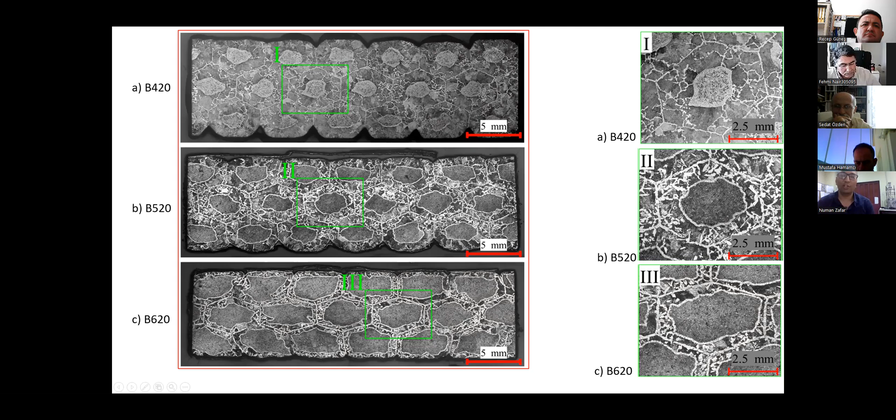Why? Because what I have studied, hexagon is a perfect shape for joining the material, and it makes the material structurally more stable compared to a square structure or a triangle. Without any trouble, we used simple pressure from top and bottom, and it caused the wires to take this shape, because that structure is naturally more stable. So it is good news indeed.

So increasing the wire diameter, or core diameter, results in a smaller section of steel, a smaller steel content in the wire reinforced composite state. Here you see a steel content of 1 millimeter, which reduces to 0.5 millimeter when you increase the core diameter of the wires.

So now you have a hard core material and a softer steel matrix, and all the debris removed during the wear test is expected to embed in these materials. Because you have control over the cross section, you can also change the wear behavior of the wires if you use this material for an application in which wear is the primary objective.

First thing is first, try to see if the iron boride phases have formed. Okay, iron boride phases have formed, and they are elongated as we had expected. Good news. The microstructure of the cores at the center is different from the region at the interface with the sheath. Also, we can see that the microstructure of the sheath in contact with the core shows these white regions, right here.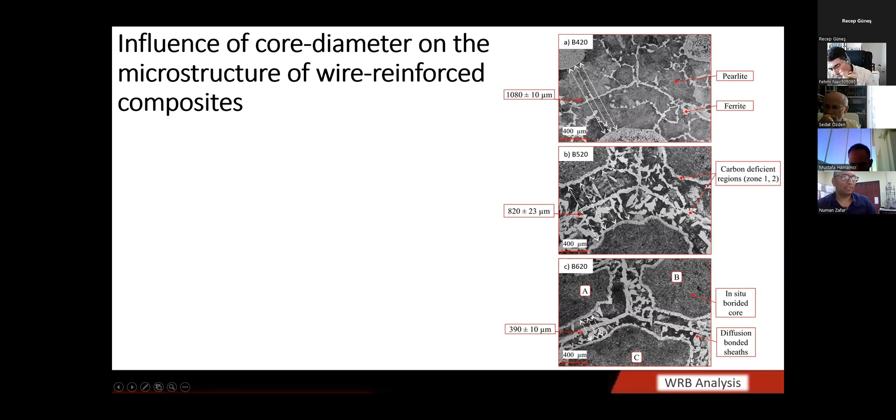We have not done anything intentionally there, but we see that the sheath which was in contact with the core has grains, though they don't have any perlite structure there. You can see this in all wires.

That is called zone 1. Zone 2 is the region in the sheath, and zone 3 is the region at interwire boundaries. There too, we can see these bands formed, with no perlite structure, and no perlite structure at the interwire boundaries either. So they are carbon deficient regions.

Here is a cross section of the wires, A, B, and C, and this O region is the place where they are bonded. I have divided the whole microstructure into 3 zones. Zone 1 is small and loosely bonded iron boride phases. Zone 2, in the sheath, is a carbon deficient region, and zone 3, the interwire boundaries, is also a carbon deficient region. This is a summary of the microstructure, with all features given here.

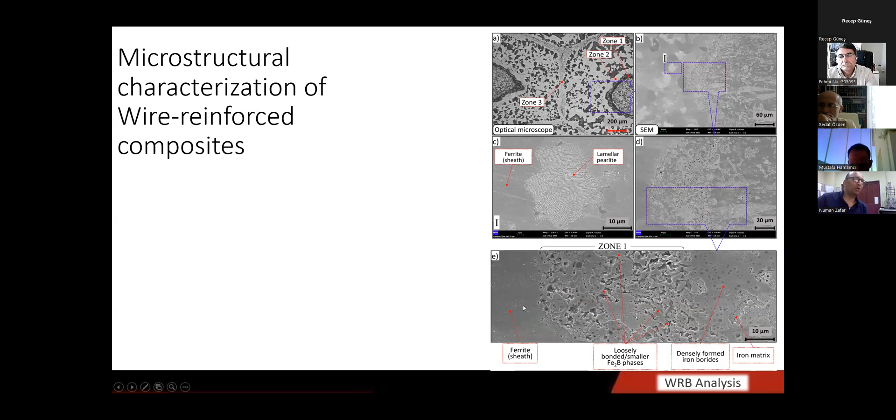We needed to see what is this thing around the wire core and what is going on there. What we saw is that the iron boride phases actually have formed there, but they are loosely bonded and not as cohesive and dense as the iron boride phases in the core. And the ferrite sheath, which was in contact with these cores, doesn't show any perlite phase.

Here is an interwire boundary region. They also show no perlite phases, only iron borides or only ferrite phases have formed. In the SEM micrograph, you can't see it very clearly, but in the optical micrograph, it is very clear.

So we needed to see what is going on. We did an EDX analysis running from one wire to another, and we saw the carbon content at the interwire boundaries was lower compared to the region belonging to the different wires. So we can safely say that these regions are indeed carbon deficient regions.

Why have they formed? Well, that might be because of the diffusion of carbon from the sheath to the cores at the region of the intercore wires. A similar thing has been reported for surface boriding, but that is a completely different phenomenon.

What happens there is that after the formation of the iron boride phases on the surface, there are some regions right here known as the transition region. Complete diffusion of boron to the host iron steel does not happen, which is why softer regions are formed: a high hardness region, a low hardness region, and a substantially low hardness region in the host.

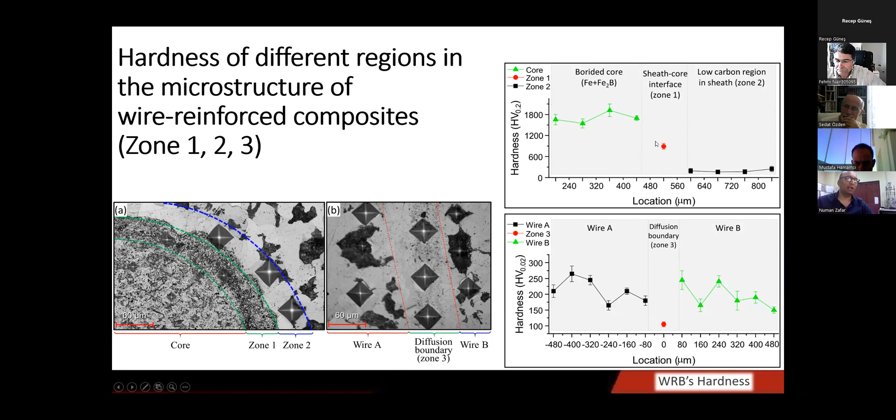These images show typically the same thing I have just said. Interwire boundaries: high hardness, low hardness, high hardness, and interwire boundaries low hardness. Core: substantially high hardness. Zone 1: a little low, and then lower hardness.

While people were reporting the hardness of these transition zones, which are formed because of the presence of elements in the steel, they have also reported low hardness in the transition zone. These are some studies which have reported the hardness of this formation and hardness of these materials.

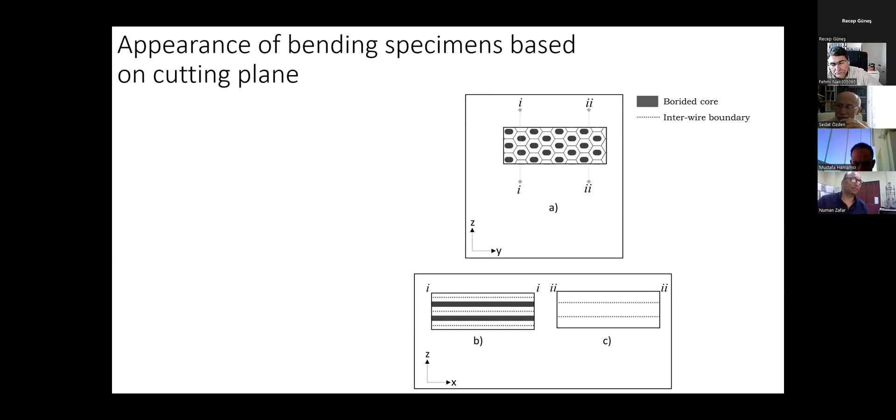Last few slides of this presentation. So we have cut the specimens, if you remember, in these planes, and depending upon the cutting plane, we can see the wire cores — dark colors represent the cores — and these are interwire bands. They were exposed, so we were able to see the type of cracks formed in which component of the wire, and which components of the wire reinforced bulks. These are the results of the wire reinforced bulks 3-point bending tests.

Quite interestingly, the B00 specimen has behaved extremely ductile, and the B400 specimen has substantially low load and fails very quickly. So the claim which we made while studying the tensile behavior of the wires — that the geometrical discontinuities are a very important phenomenon — must be taken into account while doing the bending tests.

You mean between the core and the sheath? I mean the wire core diameters of the wires which have constituted the wire reinforced components substantially influences the bending behavior. Here is another example: increasing the core diameter reduces the load at failure and also the length.

And here I have compared — if you don't see this, this one — 410, 415, and 420, they all have in situ borided phases, and their bending behavior appears to be similar. The 400 specimen does not have any borided cores, so it has a lower load and a lower extension.

Again, pre-sinter or after sintering? These are in the bulk form, so they must be sintered. After sintering, okay, of course, because of the presence of iron boride phases.

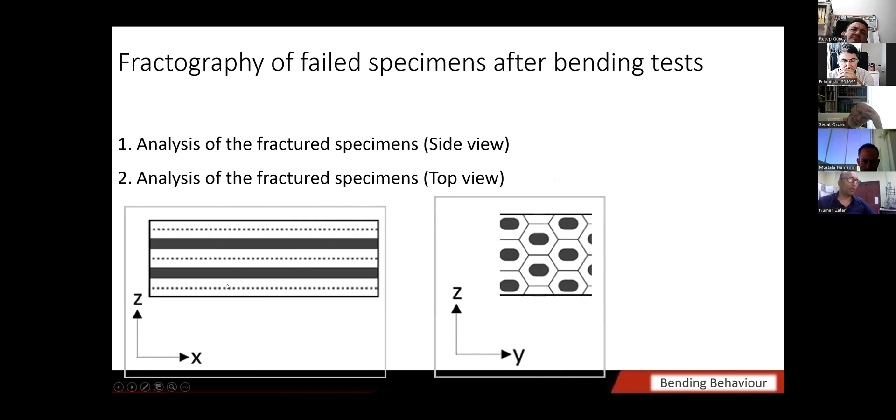So I have studied side views for the fractography and the top views with the electron microscope. These are the two types of views we have studied. This is interesting to see: after bending, this specimen was elongated very highly, so there are no cracks formed here, but the surface shows a material subjected to tension, a typical steel which, after tension, tends to show a structure like this.

We can see that the cracks which are formed in the transverse direction, when they reach the interwire boundaries, they tend to change instead of being transverse to the longitudinal direction. So after these observations, I have taken these notes.

Cores are preferably failing with transverse cracks, no matter if they are under tension or under shear. That means the cores which belong to the lower wires of the material, they fail in transverse direction here.

The interwire and sheath-core interfaces, these diffusion bonded interfaces, they fail with longitudinal cracks. This can be said that the transition zones which were loosely bonded iron boride phases, or maybe the presence of ferrite phases at the sheath-core interfaces at the interwire boundaries, might have caused them to fail in longitudinal direction, because shear stresses tend to change. It tends to break them at the weakest area.

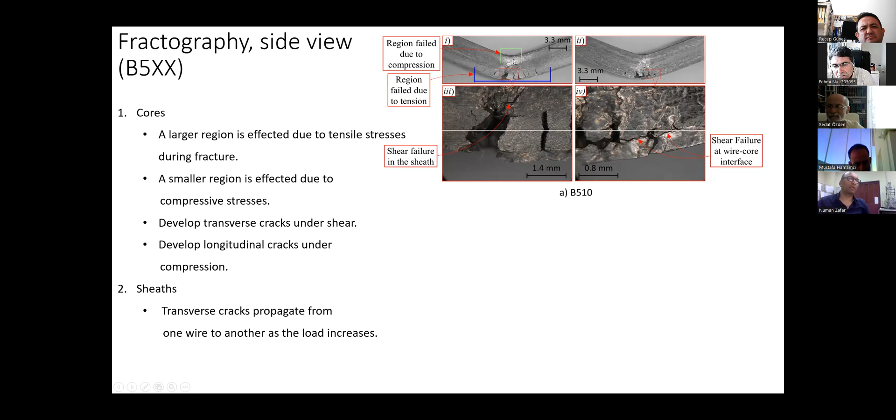The region which is under tension is majorly influenced by the tensile stresses in the bottom layer, but the region which is exposed to the compressive stresses is influenced - only a very small region is influenced with those types of stresses.

Here you can see, I showed you the bottom plane that the cores were failed with transverse cracks, but it can also be seen that the middle layer cores are also preferably failed with transverse cracks. But the sheaths, it does not happen. In the sheath, if you see, the sheath is more compliant to the type of stresses.

If it is exposed to compressive stresses, it fails under compression, and if it is exposed to shear stresses, then it will have this type of failure mode, which is typical of a shear stress failure.

This picture is prepared to show that the cracks which are produced in the wires, in the sheaths, they are independent of the cracks which are produced in the cores. This image is prepared by an image analysis in which the bottom layer is painted blue and the top layer is painted green using the pixel information.

Blue is the underlayer, and this crack, which was formed in this bottom wire, has propagated to the next wire. So if such a big transverse crack occurs in the sheath, the material fails before the core could do something. The load is reduced and the material fails because the cracks formed in the wires propagate into the next wires.

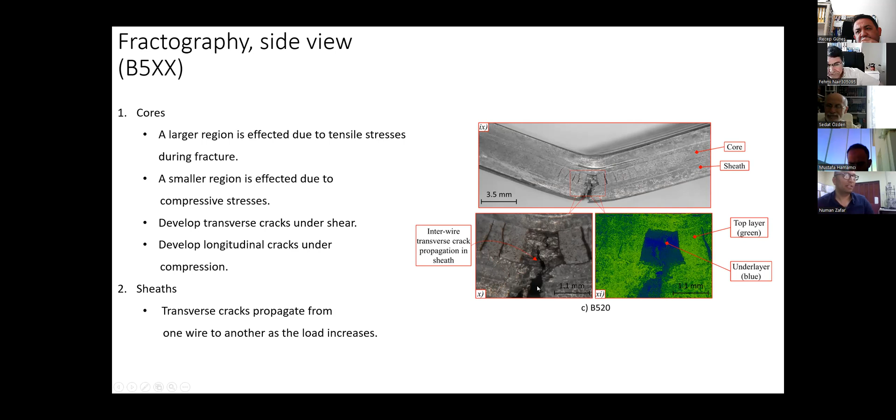Here also, transverse cracks in the core, and the sheath's shear face A and shear face B shows that this is an interwire boundary, where longitudinal cracks are formed in the sheaths.

Same thing, but I want to say that the compressive stresses result in longitudinal cracks in the core, in the top layers. Again, longitudinal cracks are seen in the cores only when they are subjected to compressive stresses. Under tension and shear, here and here, they always develop transverse cracks. But I want to draw your attention to this region.

This is an interwire boundary region which does not have any cracks. So can we say that the wires which have a core diameter of 6 millimeters, the cracks at the interwire boundaries are not formed because it has a strong interwire diffusion interface? We can say that, but the region where there are no cracks seen at the interwire boundaries does not have anything to do with the strength of the bulk material.

It has something to do with the preference of the formed cracks in the material. Because if this was the case, that larger core diameter results in stronger interfaces, then they would be stronger even - but we would not have seen anything like this. This is the same material which has the lowest failure load.

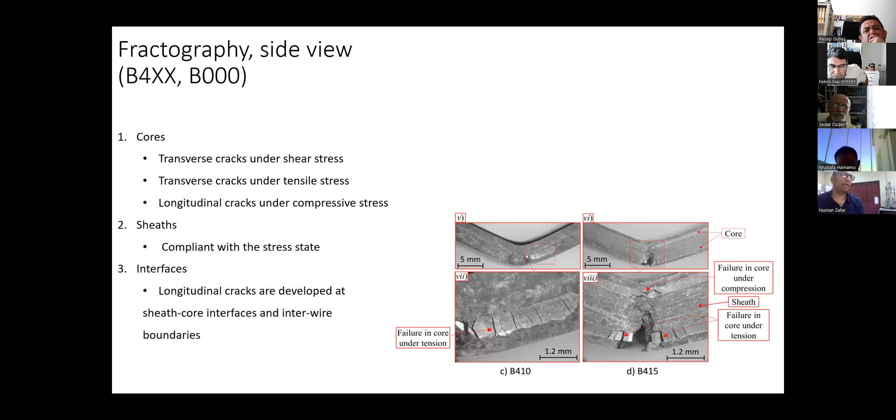Achievements of these studies: we have shown a manufacturing method, a thermochemical approach, which uses plastic deformation and powder metallurgy to make composite wires which are reinforced with ceramic phases. Hot diffusion bonding and in situ boriding is used for the first time to make wire reinforced bulks. No squeeze casting and no fiber foil type approach is used. So it is a new manufacturing approach.

Then the influence of boriding and hot diffusion bonding on the microstructure is also reported. And in the last section, we have used tensile and wire reinforced and bending tests to characterize the mechanical properties of the manufactured material.

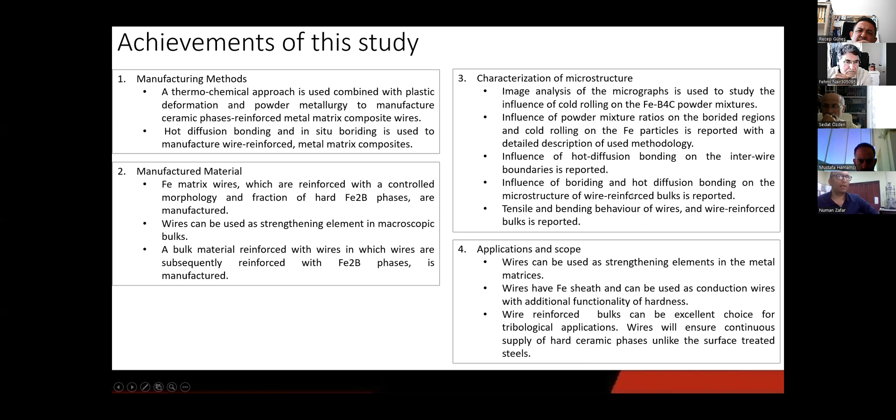But the drawback of my material is that if you are going to push the material into a loading state in which the shear stresses are going to be the dominant loading conditions, my material can fail at wire core interface, at sheath core interfaces and interwire boundaries. That is because of the presence of softer ferrite phases at that area.

Thank you for your time.

Thank you, Zafer. Have a breath. Okay, sir, thank you. Yes, gentlemen, if there are extra questions, you may have. If not, we will discuss the presentation.